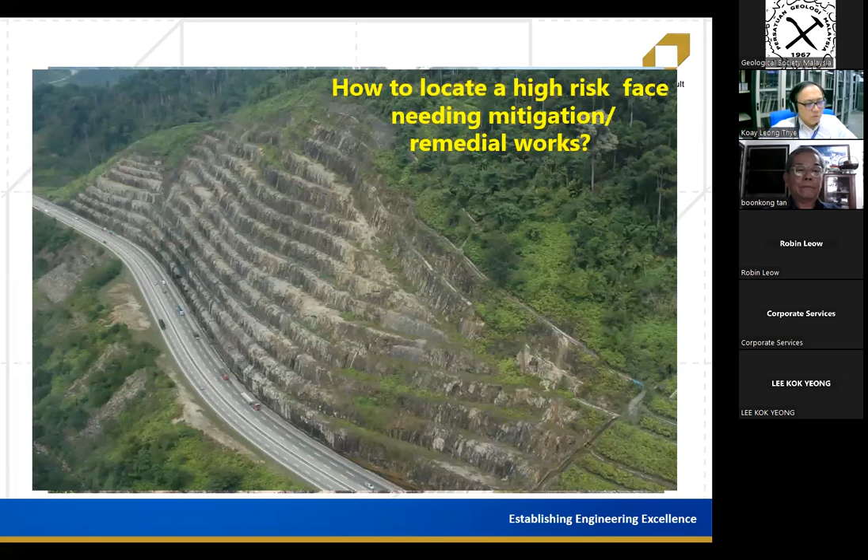So what we did was to introduce the concept of mapping cells, mapping zones. The next slide will show you - okay, this you can see is a typical slope that we have. So we have to subdivide these slopes into cells. I call it mapping cells, so that we will actually study each mapping cell piece by piece, and then we start to give rating.

Rating in terms of stability, the stability being the likelihood of slope failure, and then what are the consequences - the consequences particular for that particular zone, that particular mapping cell. So for my project, I actually subdivided it into about 20-meter widths, each of them separated by the berms.

This way we are able to get a graphic representation of the entire slope by assembling all these mapping cells. As mentioned earlier, first you need to subdivide the slopes into discrete mapping cells. This gives a graphic representation of the entire slope and makes it more manageable to map.

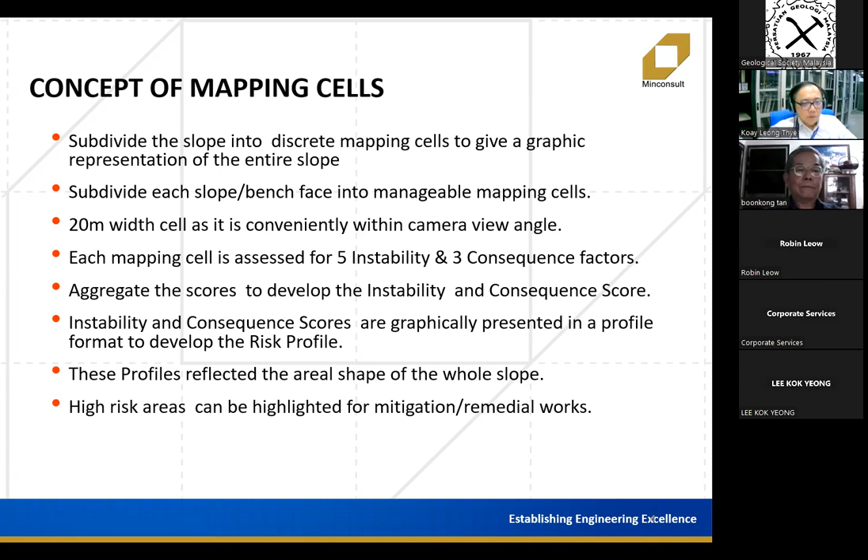I'll move to the next one. What tools and methodology did we use? We used airborne LiDAR survey - we were one of the earliest users of airborne LiDAR survey. We also have a topo map and cross sections generated from the LiDAR.

We took a lot of base photographs for each mapping cell. We did geological mapping of discontinuities, field identification of unstable rock mass, carried out stereo plots, and kinematic analysis of unstable blocks. We also gathered the slope geometry of the entire slope from our cross sections and topo maps.

Then we develop the instability and consequence profile, and finally the resulting profile is the risk profile, which will be seen for the entire slope.

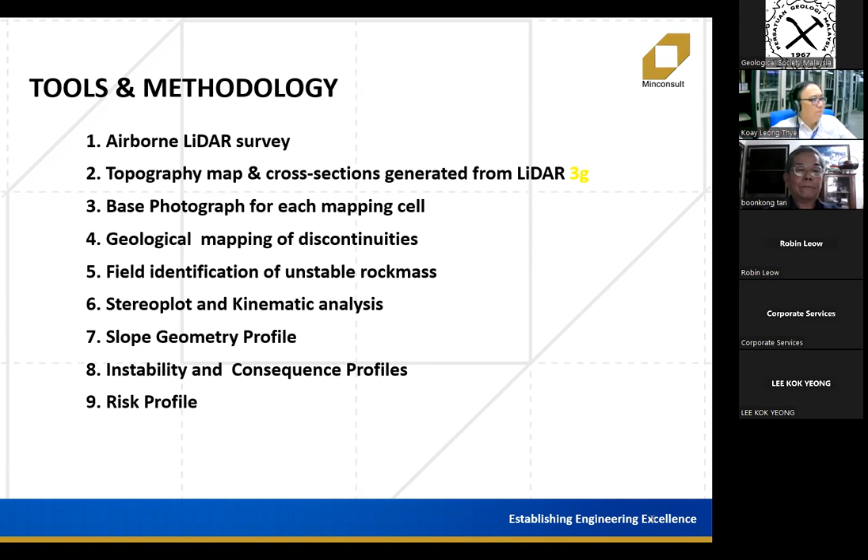Next, the field works. We started at the site by marking the chainage on the rock face every 20 meters. The reason is we want to capture the chainage marking in our base photographs. Second, we photograph the slope face, ensuring the chainage markings are captured. We carry out geological mapping of the rock slope for discontinuities, looking for faults and so on.

On top of that, we have close inspections by foot - we walk along the berms, mapping the entire rock face and bench face. In inaccessible areas, we use a skylift crane. While mapping, we identify potential unstable blocks and rock masses, and any other slope features like whether we have shotcrete, proper berms, drains, etc.

This is an example of how we develop our base photographs. Can you see my cursor? Yes, I can see the cursor.

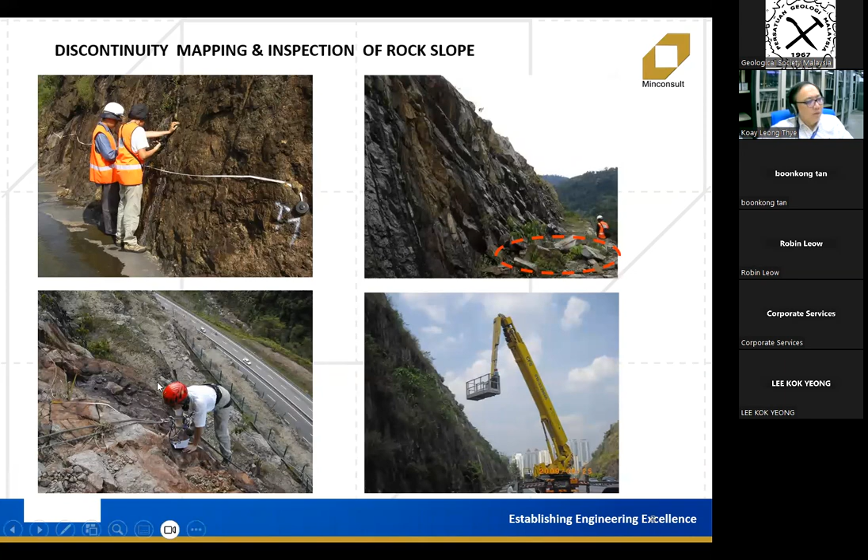Okay, as I mentioned earlier, we have the LiDAR survey, which generated the contours. We have the aerial photographs. These are being superimposed on our aerial photograph with the contours. So these are all generated from the LiDAR.

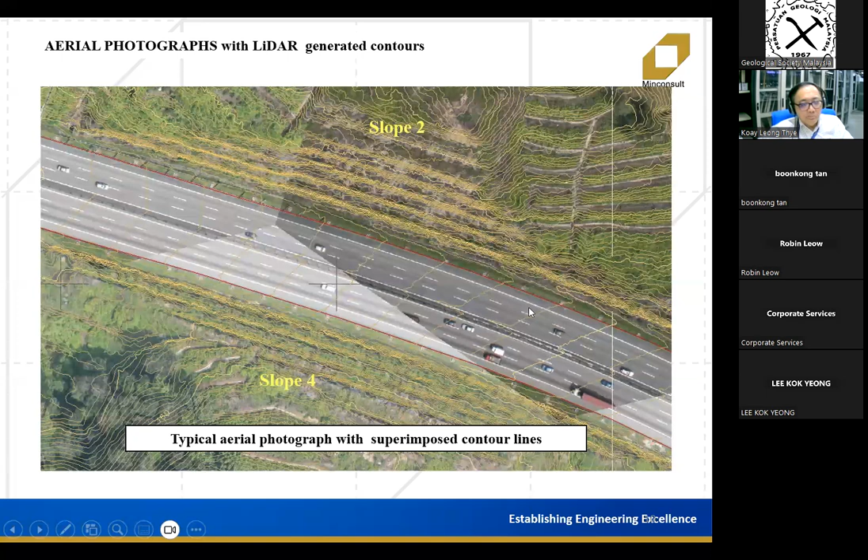What are the causes of rock slope instability? So basically, in this presentation, I'm referring to instability factors, which are influencing the stability of rock mass and influencing the probability of a rock fall. Firstly, we have the steepness of slope or the bench face. The steeper the slope or the bench face, the more unstable the stability. Secondly, we have the geologic structure, whether it's weak or highly weathered or highly jointed rock mass, it's always more unstable. Thirdly, we also look at the joint condition, whether there is clay infill, whether it's wet or persistent joints. These are all features of more unstable condition.

Fourthly, we perform the kinematic analysis when we detect the interaction of joint orientations, looking out for plane, wedge, or toppling failures. We also look at within that particular mapping cell whether we have any other kinematic analysis failure or not. So if it's more than one, whether it's 0, 1, or more than 1, we will highlight it. So we'll give certain scores to it.

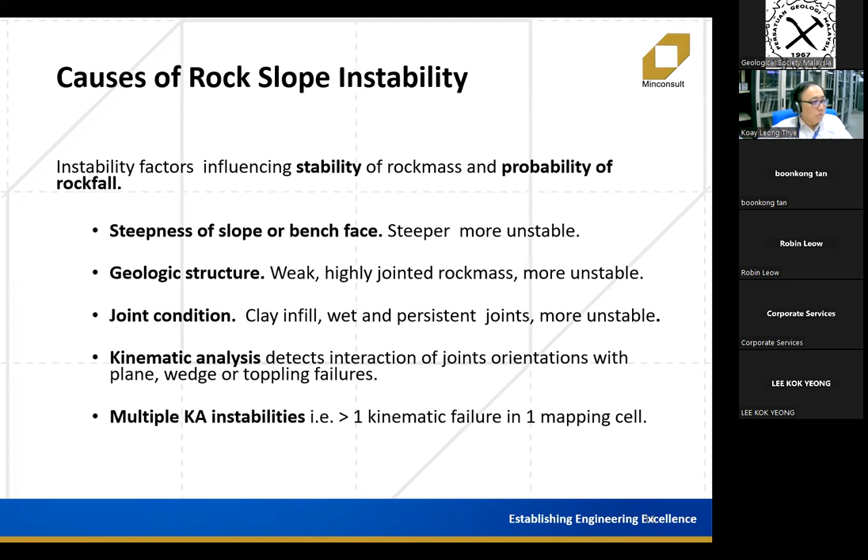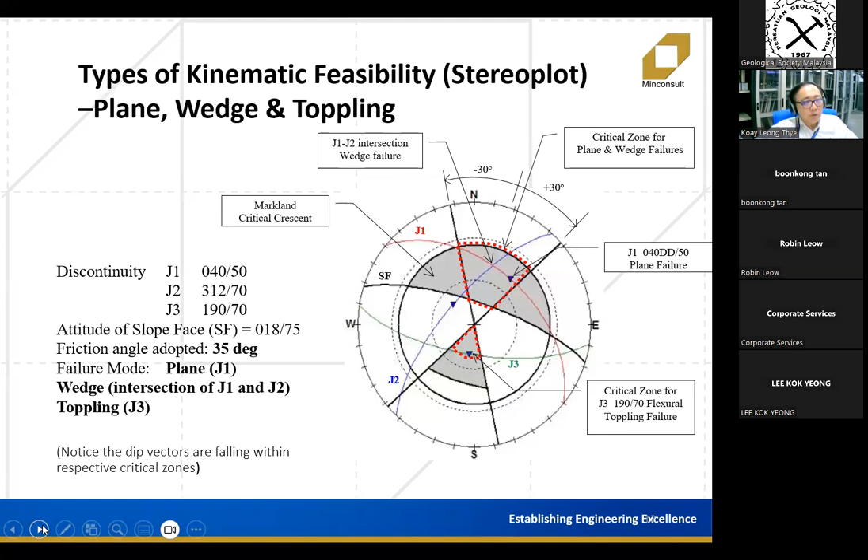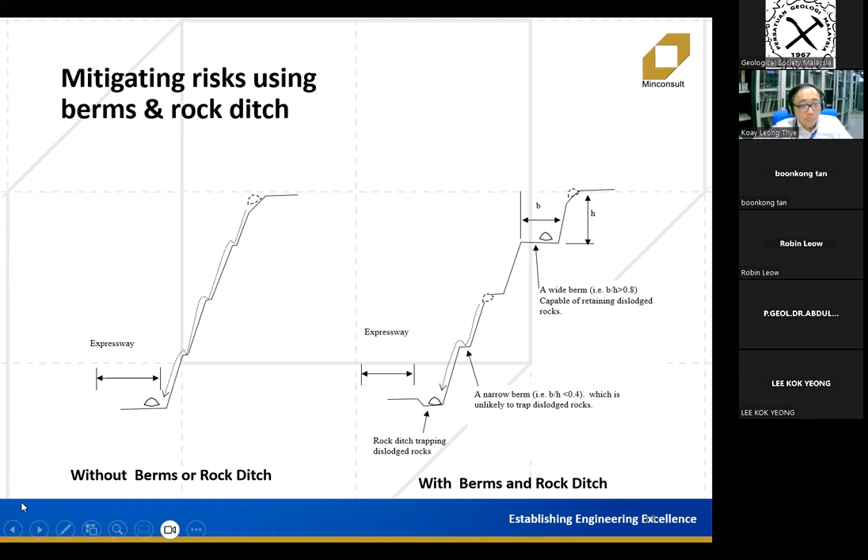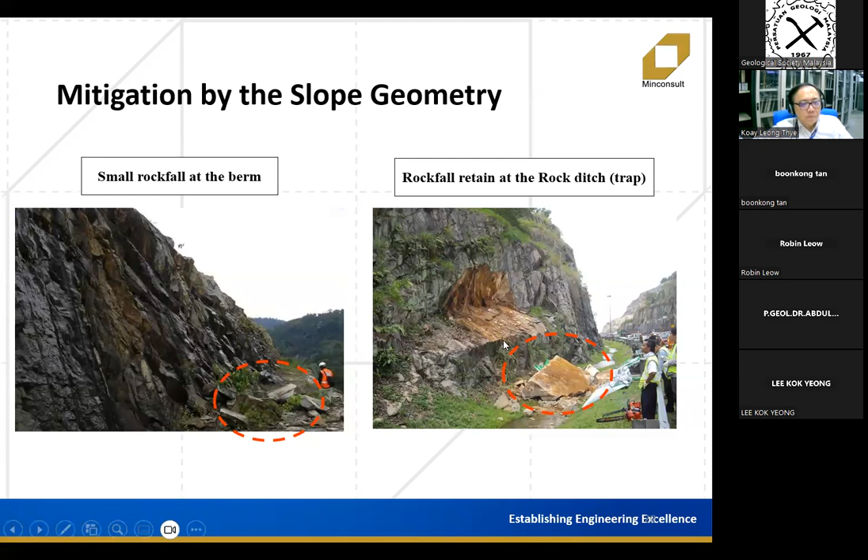Again here, there's a wide berm here, it's an effective retention of the rockfall. But over here, an example, the berm itself is either very narrow or inclined, so any of these rock pieces that came down won't be trapped here. You end up down here and then maybe spill over to the highway.

So this is something that needs to be assessed individually, not just the actual measurement. Although this berm is designed to be 4 meters, with the height of the bench being 10 meters, effectively the berm width is very, very small, hardly anything. I think nobody can even walk on there, let alone stop a rockfall.

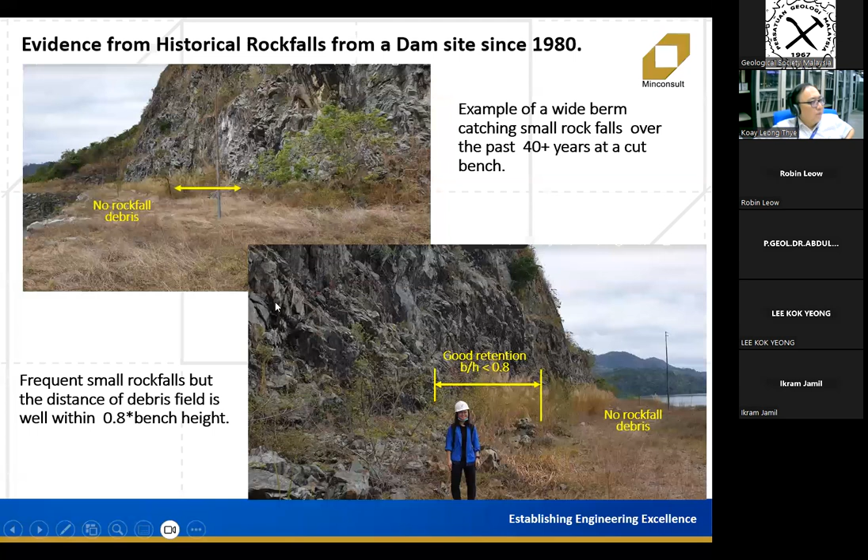Okay, now I'll talk about consequence scoring. The consequence score relates only to factors relevant during a rockfall event. If there's no instability, the consequence has no meaning - it's only when there is instability that the consequence comes into play. Moreover, good consequence does not improve your instability or stability of your slope, it does not influence the likelihood of instability, because consequence is, say for example, if you have a very live highway at the bottom of your slope, then any rockfall will have consequence.

But if you really stabilize your slope, then even though you have a very busy highway, the consequence is not significant. So actually, how does the consequence affect the risk imposed by the rockfall?

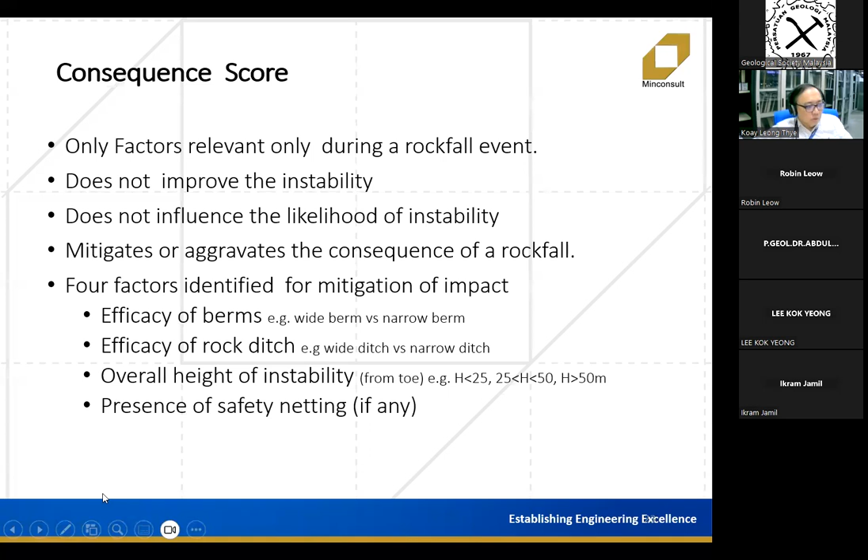So next, I'll talk about and elaborate more on the retention of berm. We have identified a certain ratio, the BH factor, which we call berm width over height of bench factor.

Say for example, over here, BH factor is less than 0.4 - that means for a 10-meter slope, the width of the berm is only 4 meters. So we consider this a poor retention. But if you have a berm where, say the height is 10 meters, and your berm is 4 to 8 meters, this can be considered moderate retention - we give a score of 1 in this case.

And if the BH is 0.8, say for 10 meter height of bench, your berm width is 8 meters - this is considered good retention, of low consequence, so we give a score of 0.

Similarly for rock ditch, we do the same - it's the same as the berm. For poor retention, you get a score of 2. Moderate retention, you get a score of 1. And for low consequence, that means good retention, you get a score of 0.

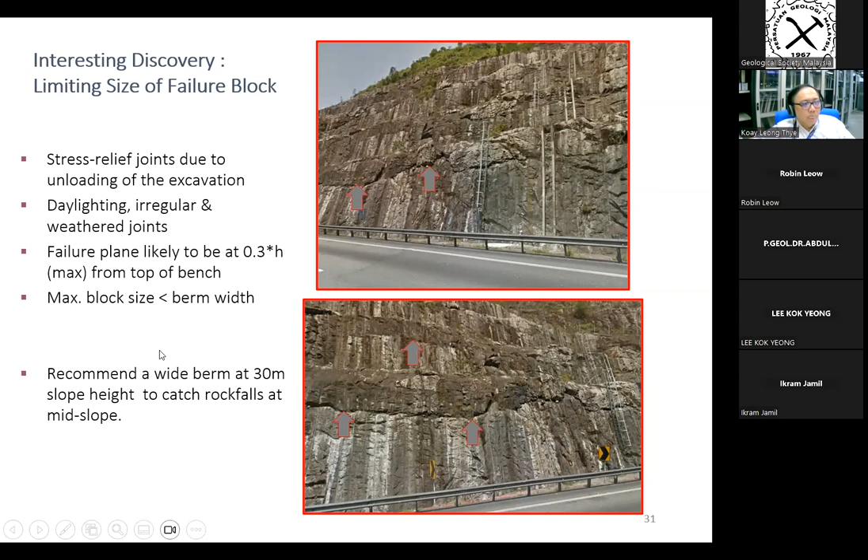So you can see here, okay.

So this observation is very important. It's quite crucial to analyze, to do the spot bolting. In case you want to do spot bolting here, you can do it beforehand, before it starts to deteriorate. Once the stress relief joints become bigger and bigger, nobody will ever want to go back and do it again.

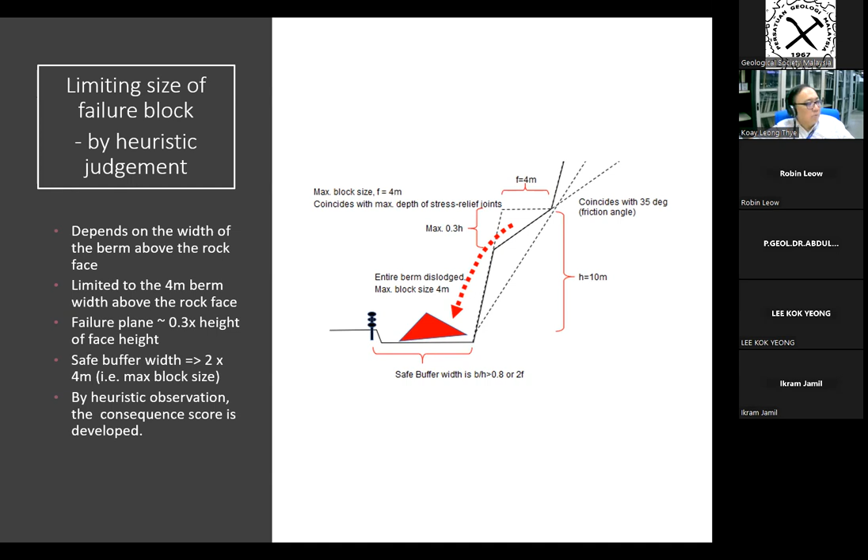Okay, this is another condition. What's happening here is that the block size, if it's about 2 meters, can be safely contained in a 4-meter berm width, if the block size is 2 meters or less.

Okay, this is also the same thing. The other thing is that I would recommend a wide berm at about 30-meter height, because if the height is 50 meters and the slope continues up like that, it becomes more dangerous. But if you design the slope, say at the 30-meter height, with a wider berm, say 2 times the typical berm, then any failure can be easily deposited here, rather than allowing it to tumble all the way down 50 meters or whatever. This is quite dangerous, so this berm actually acts like a break, a break in the berm, made wider so that it can catch the rock falls at mid slope.

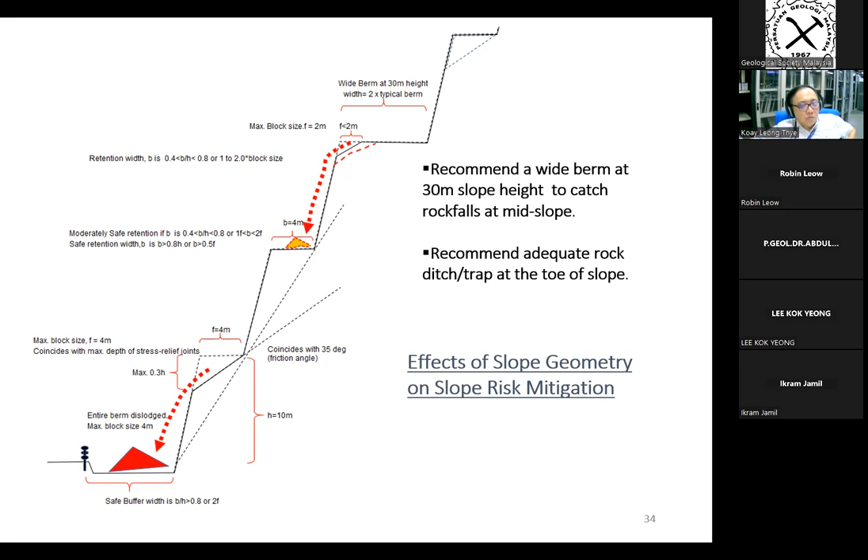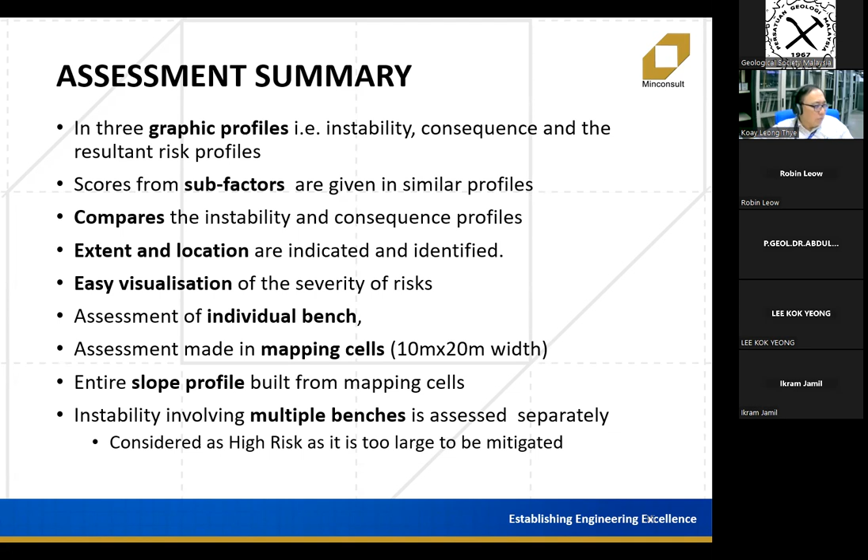The assessment, as mentioned earlier, is for the individual bench, not for multiple bench failures. And the slope profile can be presented graphically. So I think that's about it. Wait, let me see. Wow, thank you very much. That's about it.

I think maybe it's a bit technical. I hope you guys didn't turn sleepy or anything. No, it's okay, it sounds interesting. Something new also with your approach, it's quite different from the traditional ones, the traditional one I see, they will just declare whether it's safe or not safe already. No, I think it's more than that.

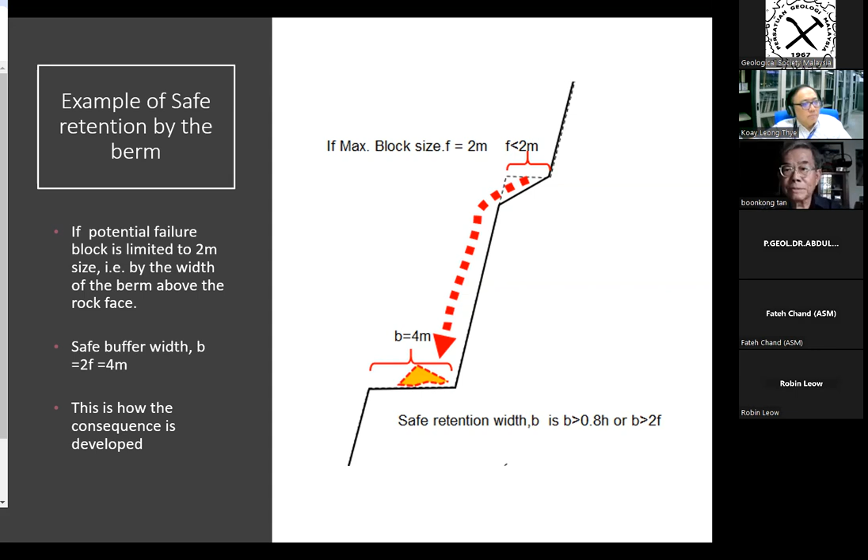They are the same size, 20 meters width. Yes, because when you showed the picture on the slide, it didn't look as if they were the same size, that's why I wanted to know. Oh no, we purposely made it 20 meters, so that we can just put it inside the Excel sheets.

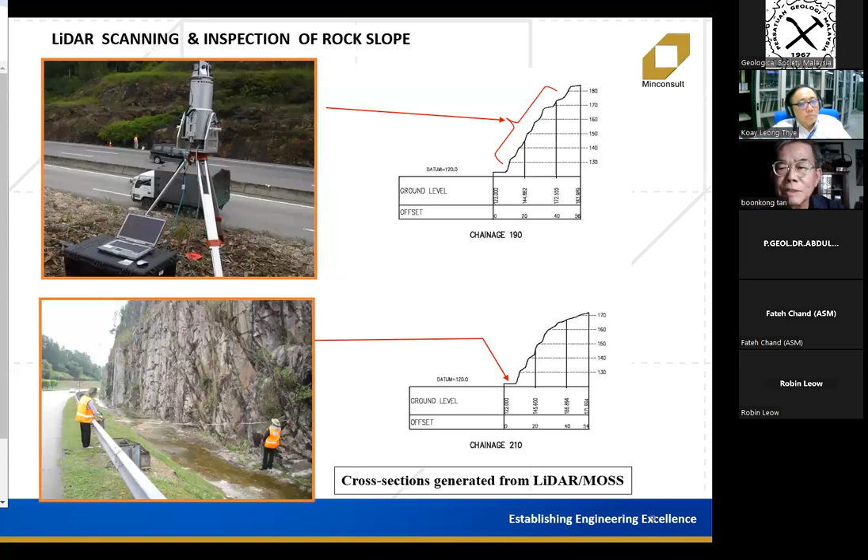I see SP Chen, you're also there, right? SP Chen, any question from you? We have another very senior guy. Chen Shipei, are you there? Yeah, Professor, okay, thank you very much.

It's good to see you guys. And thank you to Mr. Koay for a very interesting lecture. It's my pleasure to share with you guys. Actually, it's something outside the technical part of it.

So we all know as practitioners, as engineers, as geologists, we know what is good for safety. We must have a rock ditch, we must have a wide berm, and then we must have a low slope and so on. But generally we are not in control of what needs to be done. A lot of this is governed by the economic part of it, the financial part of it. So in your experience, Mr. Koay, how easy or how difficult is it to persuade the people who control the purse, because they will ask, are you sure this is necessary? Is the risk there, or is the risk exaggerated, and so on?

How do you deal with it in an event like this, Mr. Koay? Can you see the slides? Can anybody see the slides? Yes. Look at this one, this is actually around Jalan Duta and NKVE. So you see, if there's anything that drops off from here, it can end up on the highway itself.

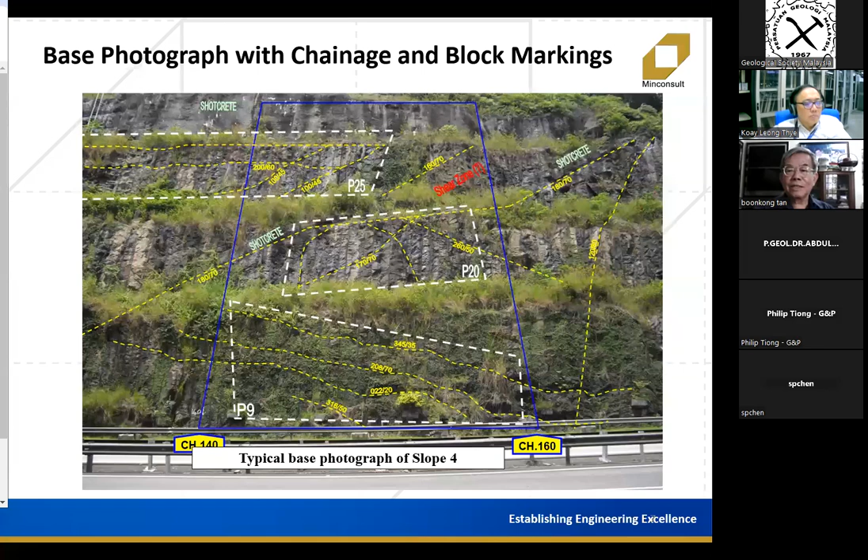Just now I saw the grid line - I think in the concept of mapping cell, the 20-meter width one. Regarding this photo you showed, basically you are suggesting when the mapping is done, we do it in the grid line - cell by cell? Yes, cell by cell. So the benefit is maybe can be more focused on the localized critical area.

Yes, localized bench by bench only. But separately, if there's a big fall or something cutting across, that will be separate - big falls, maybe daylighting joints or whatever, big wedge failure coming out, this type of analysis is not suitable, it will be seen globally, analyzed globally. So we do some stereo plot analysis to determine whether in that particular slope we have major joint sets that can cause problems to the entire slope or not. After that is found not to be there, only then do we start working on this procedure - so this procedure only defines where exactly to repair, where to protect, where to stabilize.

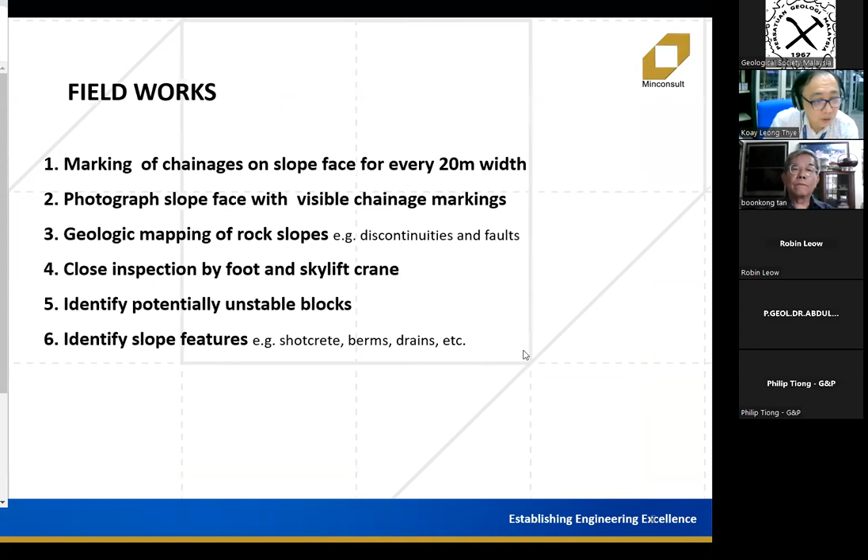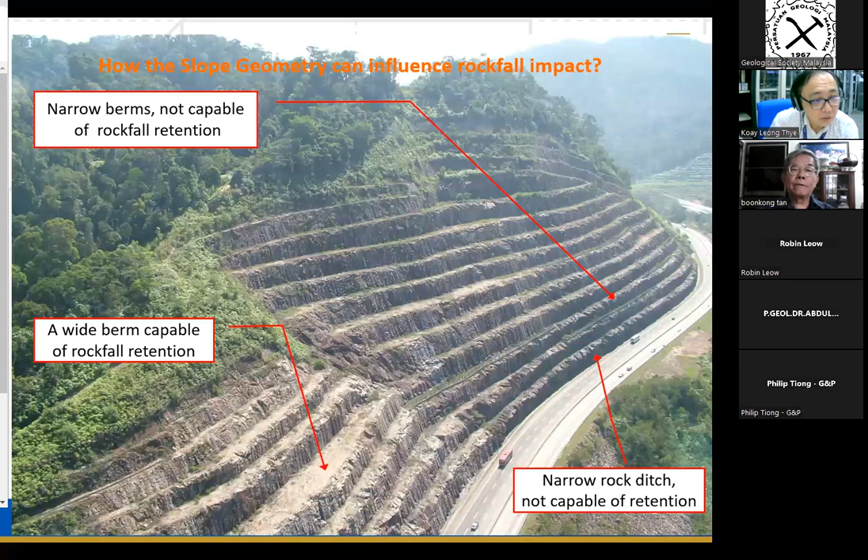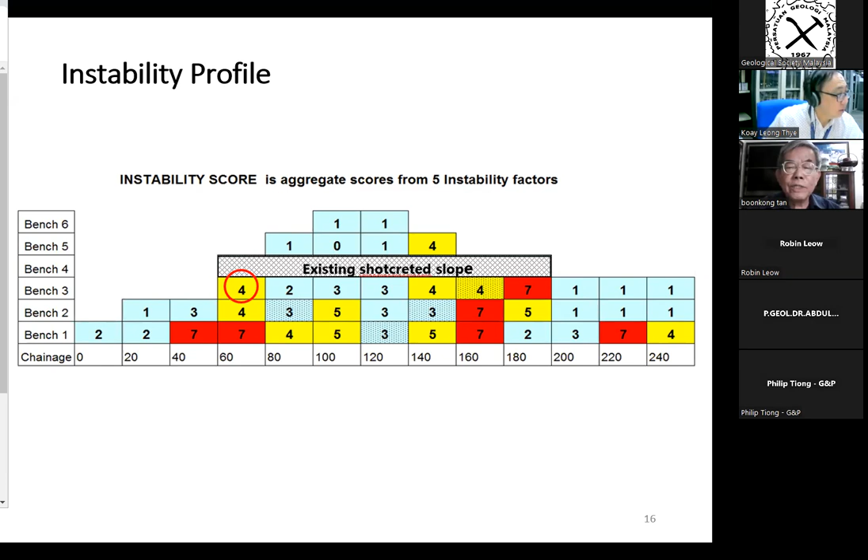Koay, number one, in your stereonet analysis, you use phi equal 35 degrees. Is that just picked from the book or something? I think 35 is quite a reasonable figure from the published book and all that, but for actual granite slope, in real case I think we can go about 40. Okay, the angle of repose is about 40. Yeah, because if your rock slope is kind of fresh rock, grade 1, grade 2 type, so phi can be higher, 40 degrees I think.

Yes, okay, that's a small matter. The other thing is in your scores, for example, in your instability scores, what is the cutoff value? You have like 0 to 10, isn't it? So what is the cutoff, the danger value, is that 5 or 6? Or is there a danger cutoff value like you say?

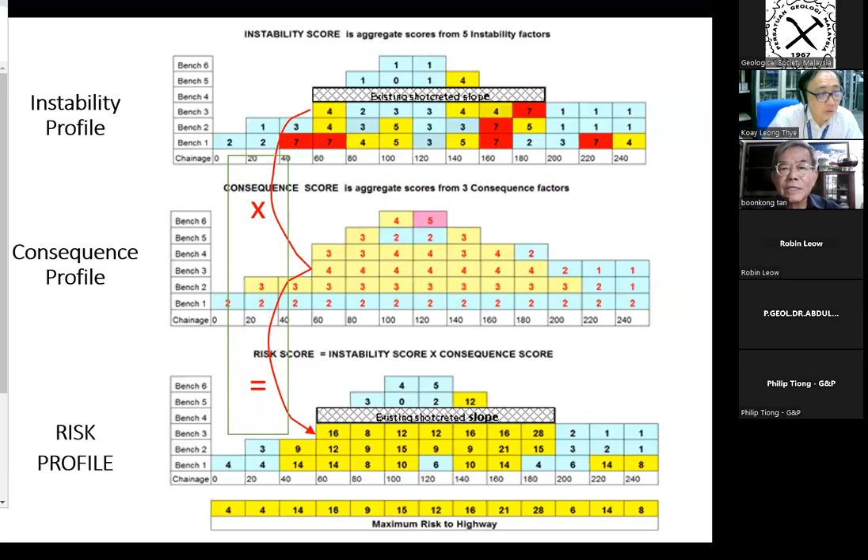Like this one, sorry. For example, the very first one, in fact in all three you didn't mention what's the cutoff. Normally there's a cutoff, okay, above that is not stable. This one you have to assign. This score is assigned, I mean, so for example, we use, say for example, this bench face less than 50, then 50 to 69, then 70 or more, so we assign a score of 0, 1, and 2.

Yeah, so the scores are actually reflective of favorable, medium, and adverse condition. So we have 5 of these parameters inside, so we just add them together. But if you want the adverse one, probably the worst one is 2, 2, 2, 2, and 2, which is how many, 10 already. I mean your score is from 0 to 10. So where's the cutoff, total score for each cell? What is the cutoff? Is that 5 or 6 is not stable, for example? You didn't actually mention. Yeah, we did not mention the total score cutoff for each cell.

If it's 3, of course it's stable. If it's 6, it's not stable, for example. Like I did over here, you can see the consequence score. This is low consequence. 3 to 4, 5 to 6 - these are just arbitrarily put in to separate out, because I know the worst possible score is 6. So 5 and 6 is the worst case. Then moderate is 3 to 4, and low consequence is 0, 1, and 2.

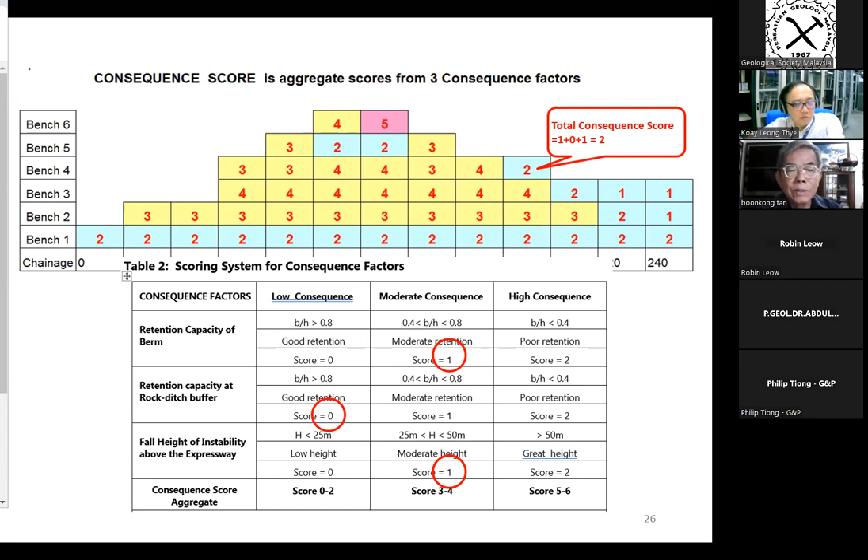Same goes with this one. The instability one I did not put, but I think adverse is about maybe 8, 9, 10. Then 4, 5, 6 is medium. Then 0, 1, 2, 3 is favorable.

But my other question is this: you're doing based on bench slope, but in general for practical slope stability, rock slope, we actually look at the overall big slope, the whole slope. We avoid it when a major part of the slope fails, not the bench slope. If you get 1 or 2 bench slope failures, it's not considered a risky thing. It's only when there's a major slope failure, either by wedge failure or plane failure, cutting through several benches - that's the major problem.

That's why my title is actually engineered rock slope - that means it has a certain more or less dimension, geometry. But we actually study the real as-built condition of the slope, because the engineering maybe wanted to have a 4-meter berm, but in actual fact it's 2 meters. Some are wider, some are smaller than that. Then the height of the benches also 10 meters, some are 9.8, some are 10.5. So the height of the benches is quite consistent relatively, but the width of the berm is not.

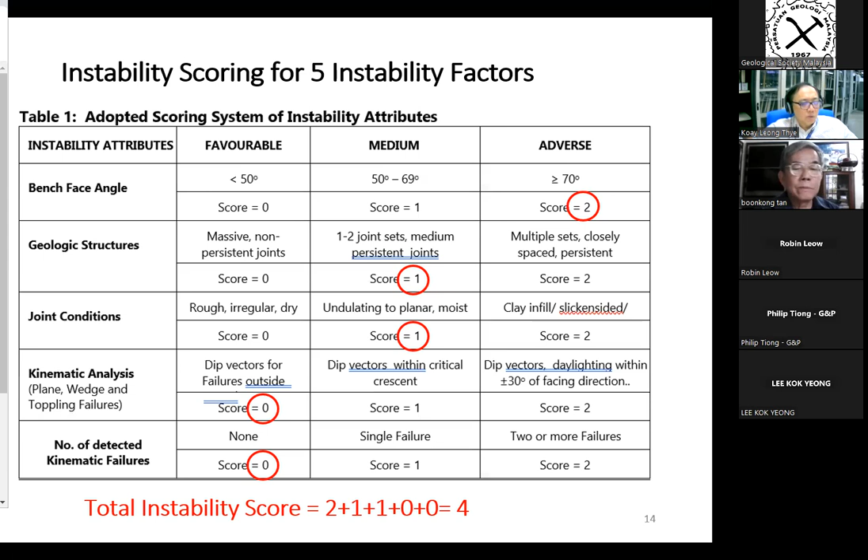So okay, my one last question. I'm curious, I saw through your CV that sometimes you work in the capacity of a geotech engineer, not just engineering geologist. Is that really possible? In a way, yeah, to be honest. Some of my real appointments are engineer, geotech engineer, not as engineering geologist.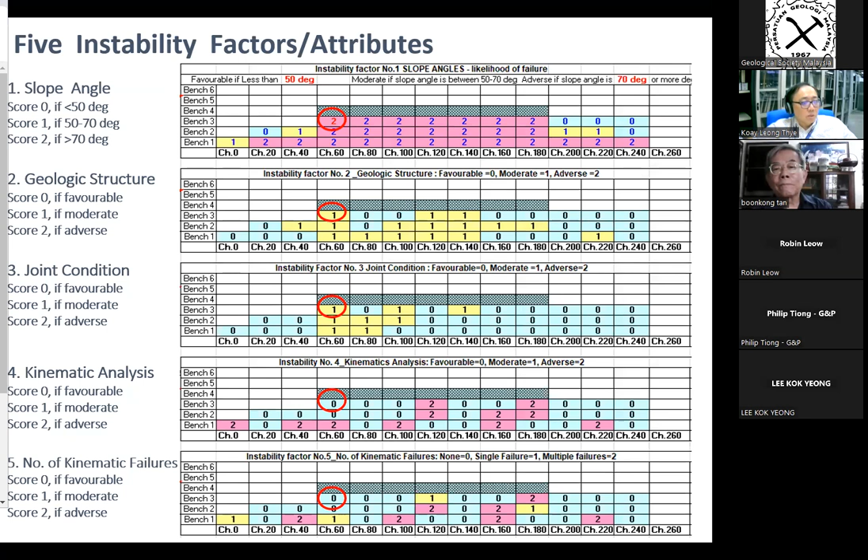Not as engineer, because in fact it started as way back as 1992. My position at Renhill was geotech engineer, that was way back. Nowadays people are more particular about whether you are a geologist or an engineer and all that. But I can tell you that I'm quite well experienced in terms of the engineering, geotech engineer, even structural engineer, because when I first started working in Renhill, my position is such - not because of anything else.